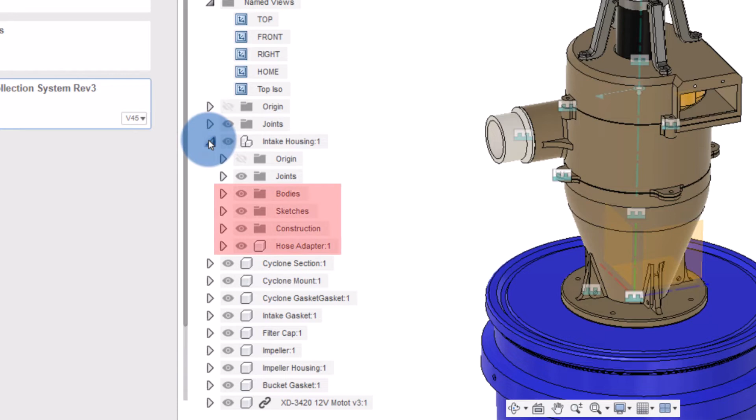While this can be a good way to work with components, the bodies for the intake housing are at the same level as the hose adapter component. I'm going to undo that change and do this a different way. Keep in mind that every time you add a component or drag and drop a hierarchy, it adds to the timeline. I'm going to create a new component called Intake Assembly.

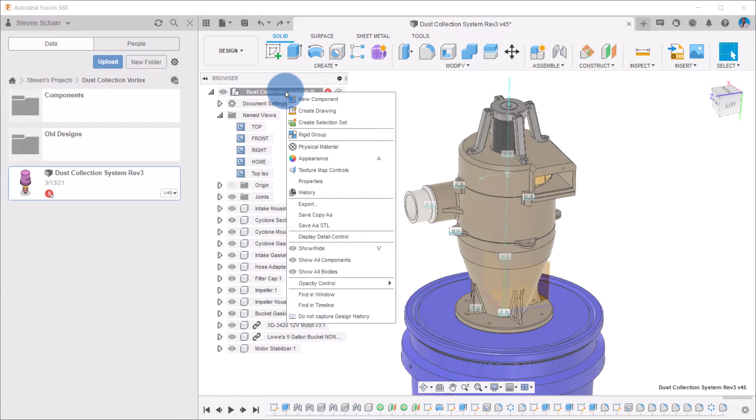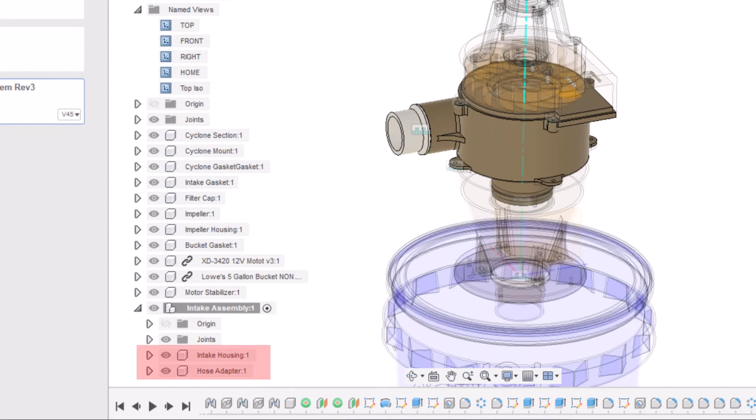I'll right-click on the top level assembly and select New Component. In the New Component dialog, I'll enter the name Intake Assembly and click OK. Then I'll go ahead and drag the intake housing over the intake assembly and the hose adapter over the intake assembly. This now creates a subassembly that contains the two components, with each component being at the same level in the hierarchy. Use this process to keep your assemblies clean and well organized.

This makes it easier for you if you have to go back at a later time and make edits, and for other people who are going to open the assembly file and work with it. Well, that's the first 2-minute tips from the 3D Professor.